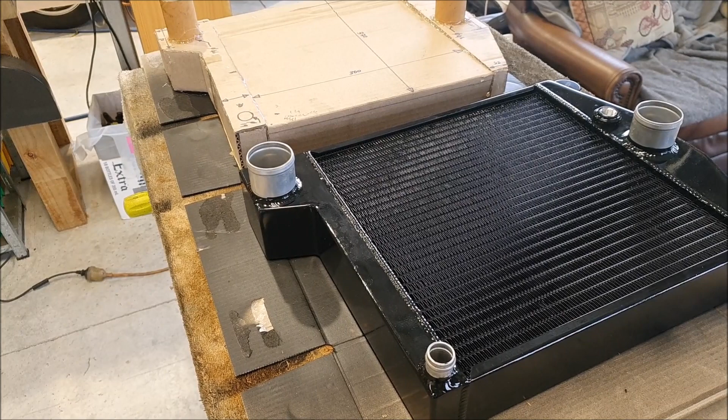It's been a little while since I've made an update on the Riley. I've actually been waiting for parts to arrive.

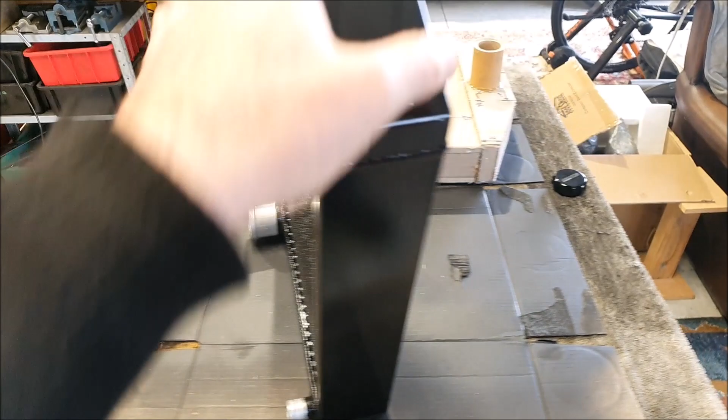So this is my radiator core I had made. You might remember I'd made up a fake steel shell for now, and I designed the biggest modern style core I could fit to go inside there. I drew all of that up in CAD, and I sent the drawings off to a radiator making company, and they made me this modern style aluminium radiator. So it's very light. It's basically made exactly how I specified it, and this should work well.

So the ports on it, obviously you've got the filler at the top. That was the smallest one I could get, which will actually fit inside the Riley one, on the outside of the shell. So you'll be able to take the radiator cap off and then get to this one. I will put a little vent in the cap because this isn't pressurized, of course.

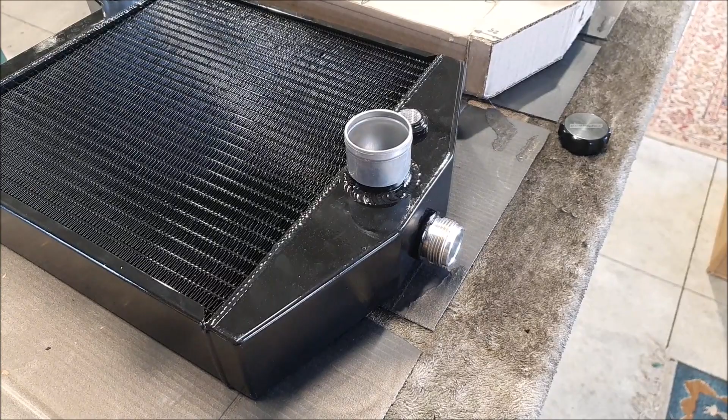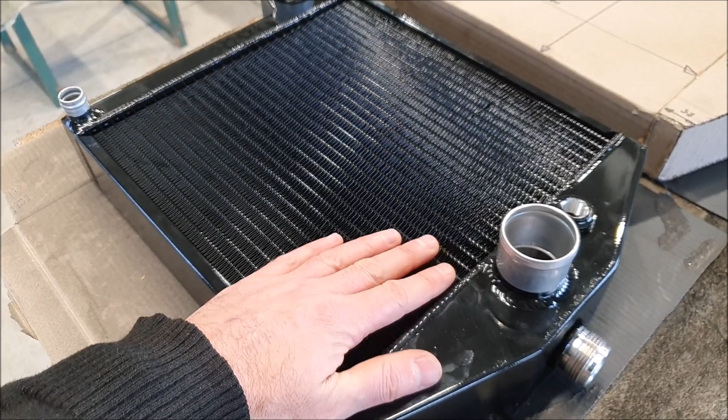This is the water inlet, so this comes from the top of the engine. Obviously the engine heats the water, it rises up in the engine, comes into the top of the radiator, and then cools down with the airflow, and then sinks, and then comes back out of here, back into the bottom of the engine. I've got an extra port up the top here, which is for a temperature sensor.

That's a screw-in one. I've got a mechanical one. It's actually off a Komatsu tractor or digger or something like that. It's all purely mechanical, which is good. It means I don't have to do any wiring or anything, and it looks more or less the part, but obviously I can change the face of the gauge later on, make it look more vintage, put a replica style face on it.

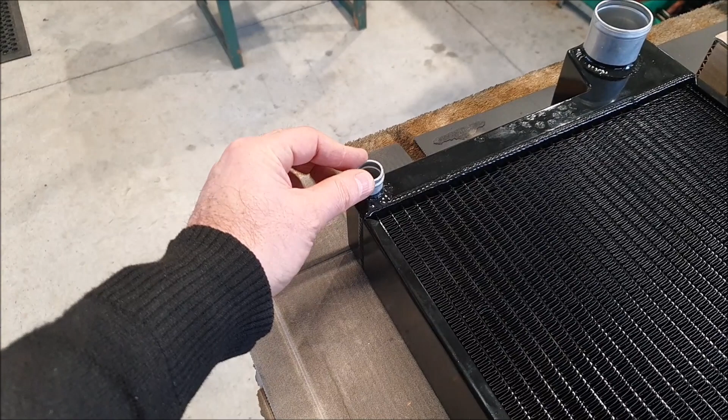I also had them put in this extra little 19mm port, and the reason for this is I'm not sure if I'm going to need a water pump or not with this radiator. I don't know if this is going to be enough to cool the engine. Some people think I should be fine. Other people say no, you'll need a pump. I really don't know, and I won't know until I can actually run the car.

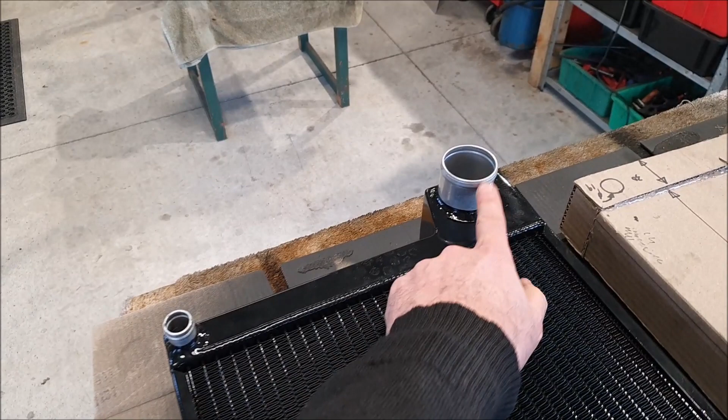So the plan is to initially have this blocked off. There'll just be a little piece of tube and a little blanking thing, or even a tap so I can drain it. And I'm just going to try and see if it works with the thermosiphon, the normal thermosiphon from the engine. If that doesn't work, I have got a little booster pump, and I think what I would do then is block off this side and have the pump on here, circulating the water through the engine.

The reason I had both of them here is just to give me the maximum amount of flexibility, and I can block off whichever one I don't need. Hopefully it'll work without needing the pump - that would be ideal. I'm still trying to get hold of one of the proper Brooklands pumps, but again, it's a special casting, and there's probably one person who's making them, and they're not making any at the moment, so you just can't get them.

After this arrived, I've been looking this morning at how I'm actually going to mount it into the shell.

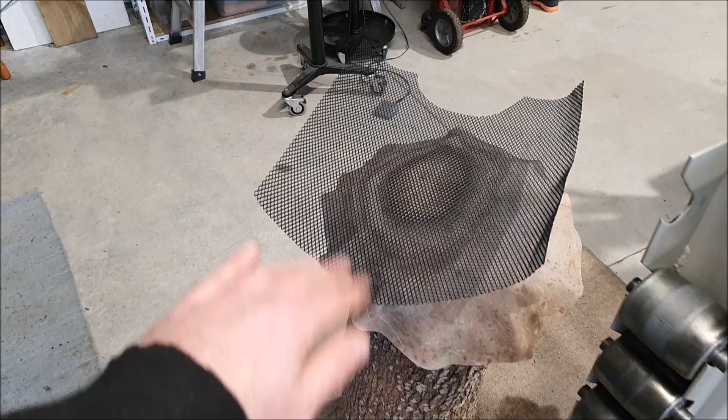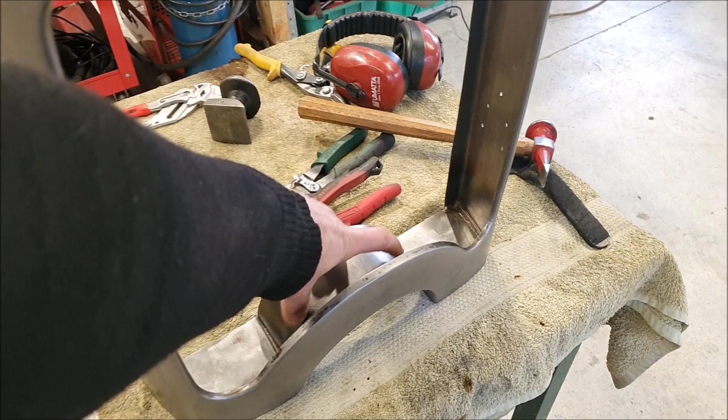So I've got my fake mesh just to go in the front. That's curved, so it actually follows the curve of the shell. And what I'm thinking is there'll be a bracket at the bottom, sort of piece on here, as a flat shelf, and there'll be some rubber padding, and the radiator will sit on that, and there'll be a little plate that screws on the back to hold the bottom of it. And I think I'll have similar in the top.

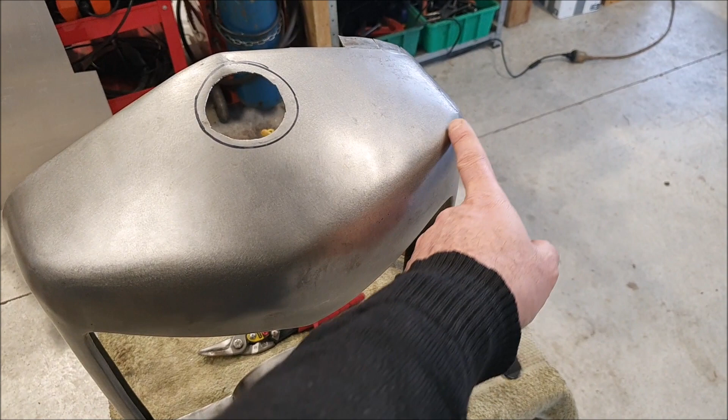There'll be a bar - or a bar's probably not the right word - it'll be sheet steel, but it'll be folded so it's stiff enough, and that'll go across, and there'll be a similar thing to hold the top of the radiator. So there'll be an external piece you put on from the back, which will bolt on, and that'll sort of clamp it all in place. That should be enough to hold it all in place.

While I was doing that, I discovered something.

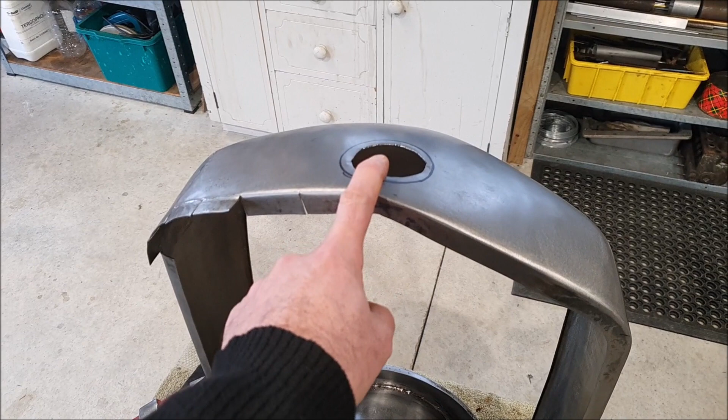So the shell fits in there beautifully. I had to cut the hole in the top. This is just rough at the moment because I still need to get the pipe or a piece of tube that I can then machine the thread on to take the actual radiator cap, and then I'll silver solder all of that in place.

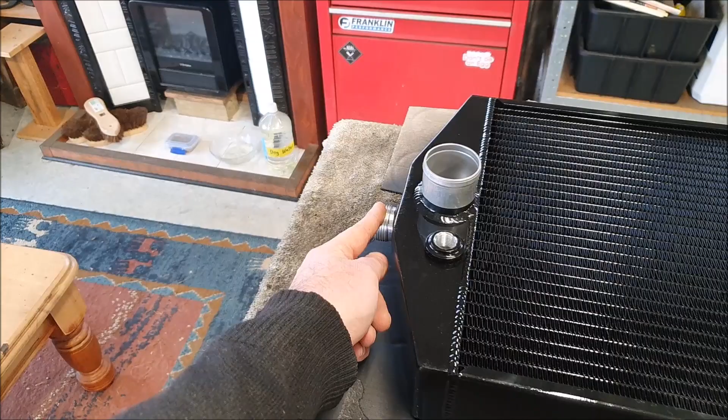I needed to cut the hole because the actual core, I sized it so it would only just fit inside there. So you have to be able to poke this up through the hole in order to get this into the shell to maximize the amount of space I had.

And what I discovered is my shell wasn't actually very symmetrical. I know it's not perfectly symmetrical on that little beak part. If you look at it right from the front and look very closely, you can see it's not exactly right. But what I found was this corner was actually about half an inch too high.

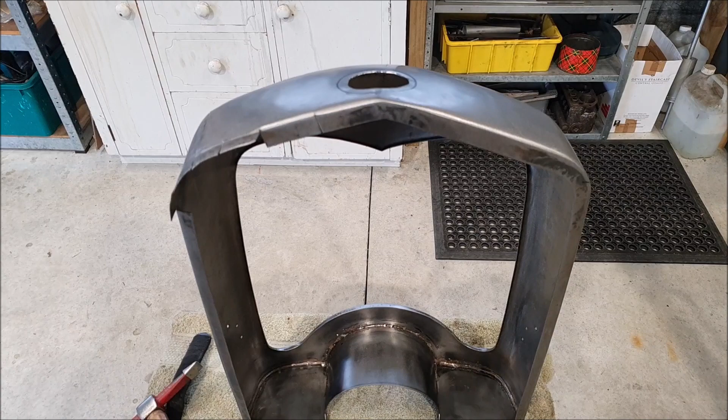I don't know how I managed to do that. I was just trying to get the shape of something like this where it's curved in all directions, and getting it even was really difficult. So that's why this looks a bit of a mess at the moment.

What I've ended up doing is I had to cut these so I could fold them back out of the way because they've been shrunk. And I effectively ended up taking a little pie wedge out of here so I could bring the top down and the side in a little bit.

And I'm still fiddling with this, still adjusting it. I needed to take out, I think the wedge was about 1/8 of an inch thick at this point, tapering down. I used a little cutting slotting disc on a Dremel and my snips and things, so that I can bring this down and get the shape correct, get it symmetrical.

I actually made a cardboard template, so I've matched it to the template now. And then I'm going to have to weld this up and then refinish it all, of course, and then fold the flange down again and re-weld that.

So hopefully that makes it a little bit better. It's not perfect, the shape of it isn't perfect, but when you look at the original ones, they aren't perfect either, they're not 100% symmetrical. So they were probably all handmade as well. So I'm going to fix this up and see how we get on with that.

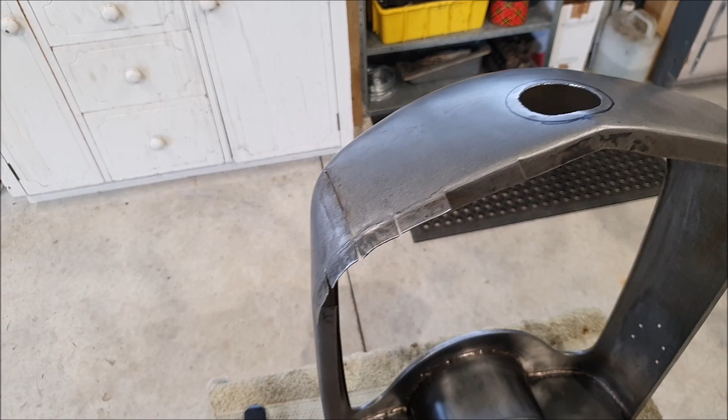I haven't been idle while I've been waiting for the radiator. So I've actually started learning how to do the more form-based CAD that I needed to do to actually design the body. I think I've spent about the last 2 weeks doing that, an awful lot to learn. I've done a lot of parametric modeling, sort of solid body modeling, but this sort of forms type modeling is a bit harder. It gives you a much more organic result, and it was a whole new thing to learn.

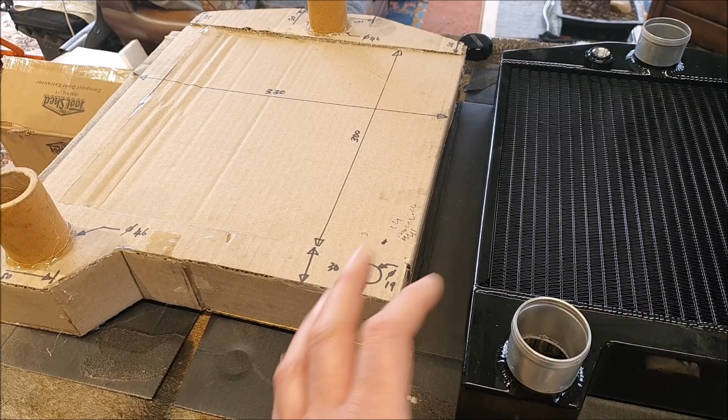So I found some very good tutorial videos online. The chap who does those really explains everything really well, and he's great at answering questions. He even did a specific example for one of the problems I was having to show how to do it. So without his help, I wouldn't have been able to get as far as I did.

So I'll have a look at that when I go back inside. But for now, I'm going to finish trying to get the shell even again and weld it up, and then refinish it again, and I can look at how I'm going to make these mounting brackets on the inside.

As I mentioned in the shed before, I have spent the last couple of weeks waiting for the radiator to turn up, and because that's taken a while, I've spent the rest of the time learning how to do the modeling of the body in Fusion 360.

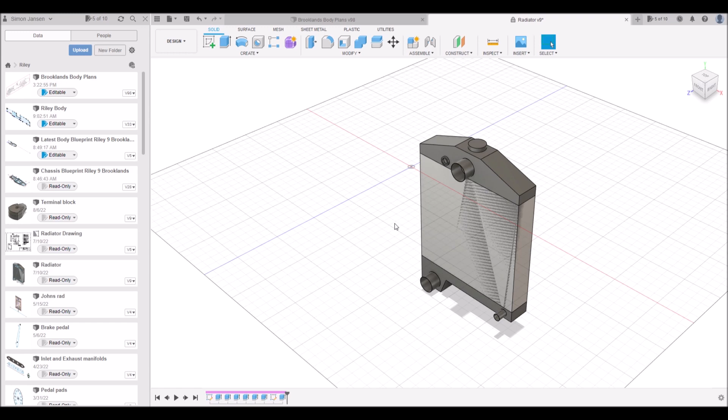So I've used Fusion 360 a lot in the past. Obviously I designed my Enigma machine with it. I've also done simple modeling, simple sort of 3D modeling, where effectively you take a design such as my radiator here. What you do is you draw what's called a sketch, so you lay out the lines, you draw the plan from different views, and then you use that sketch to extrude the parts. So you can click on things and pull them up or down, move them around, put bevels on them, things like that.

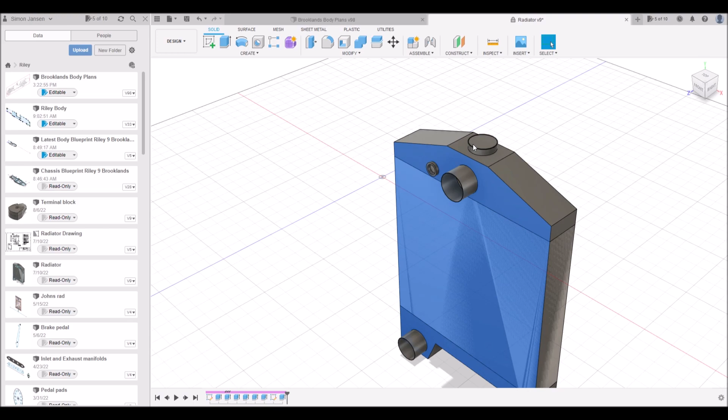So this is really good for doing parts that don't have a lot of curves on them. You can do curves, obviously, so if you pull up a circle like this, you're going to get a curve around the outside. But doing compound curves like this is very difficult.

I've done a lot of modeling like this before, but I've never done this sort of forms modeling. So I started looking around for some tutorials or help on how to do that, and I found a few films on YouTube to watch.

Then I came across a channel called Learn Everything About Design. I'll put a link to it because it's excellent. The guy there, his name is Matt I believe, goes through all sorts of things in Fusion 360, including how to design cars. He records tutorial videos and has got an awful lot of films up there. You can see as he goes through them, he comes up with better ways to explain things, so he'll do another series of films to explain different aspects.

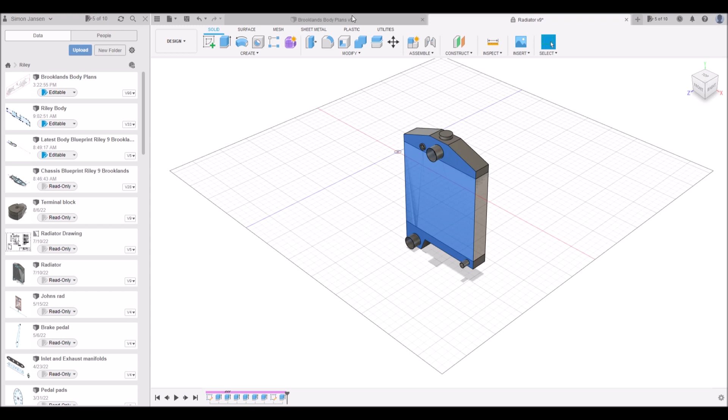By watching a lot of his films, I've learnt exactly how to do this form modeling, as it's called. His channel's quite small, so he's really good at answering comments, and he even did a special little film to answer a question I had in particular, which was really cool and useful. But I'm not going to go through exactly how all of this works because it's really complicated.

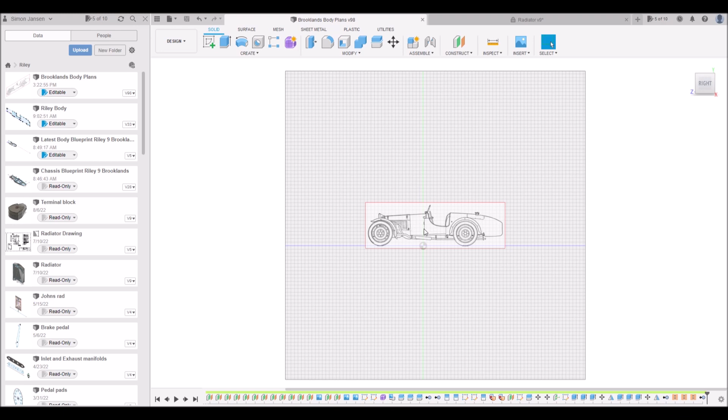Effectively what you end up doing is you find some blueprints of the car, load those into the program, and set them up as top, side, front, and back views. What you end up doing is similar to sketching in normal modeling - you effectively do a sketch, but you're doing it in 3D. You're creating what's called a form.

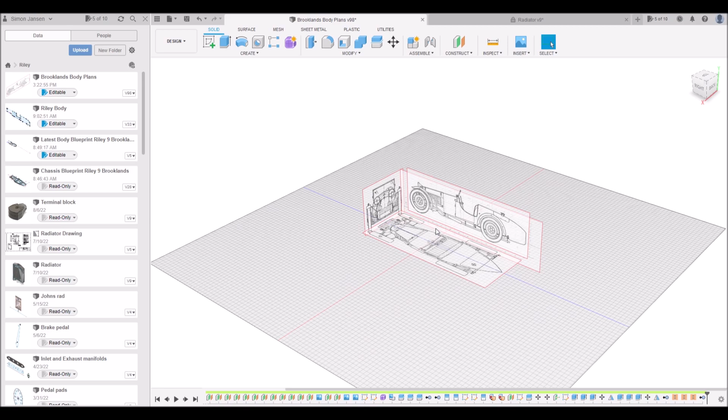If we go to where my form is, this thing along the bottom is called your timeline. This shows everything you've done in this model, but this is the basic form. We can turn off most of these things.

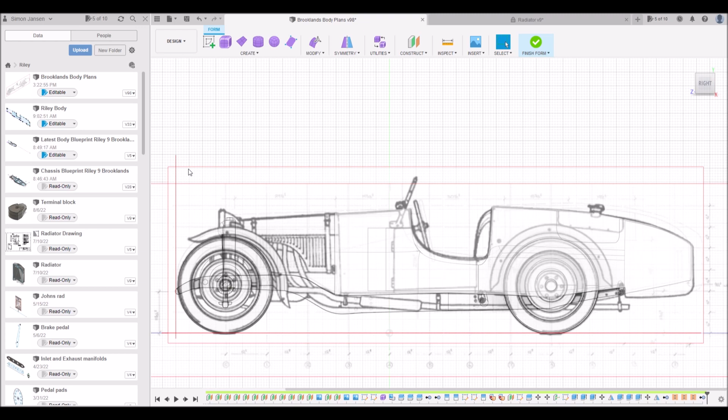If you look at the body, looking at it from the side, you can kind of draw out the shape of the body. What you actually end up doing is you draw it out in 2 dimensions, and then you can rotate it around and start moving these shapes around in 3 dimensions.

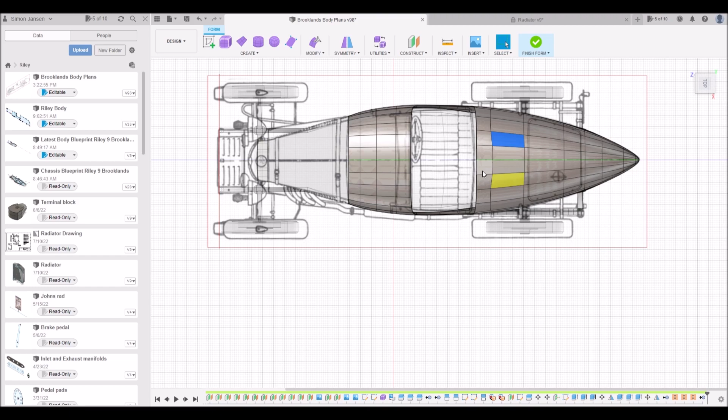I'm not going to go into exactly how it all works, but you draw out these shapes, and the program automatically applies smoothing to them. So if we change the display, you can see the shape I'd drawn out with these different panels - it's now smoothed them off.

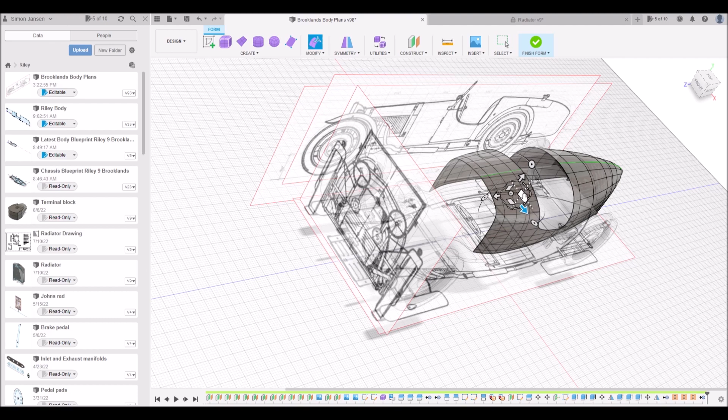You can rotate this around, grab points on it and modify them, move them around in 3 dimensions. I've got this mirrored, which is why it's got that green line there - it's showing the mirroring line. You can grab points, move them around, change the shape. You can do all sorts of really cool stuff with this.

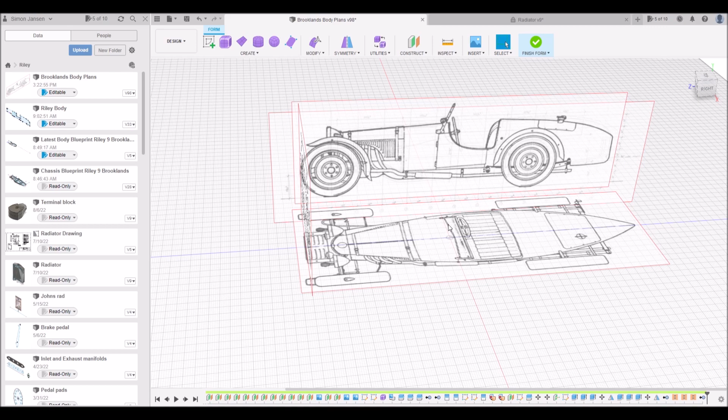So I started off with this blueprint, which is available online. It's actually a blueprint from a toy maker, I believe - I think that's the original source. This one's been floating around all over the place, you see it in multiple places, but I believe the original source was for a toy car. So it's pretty accurate, but not 100% correct.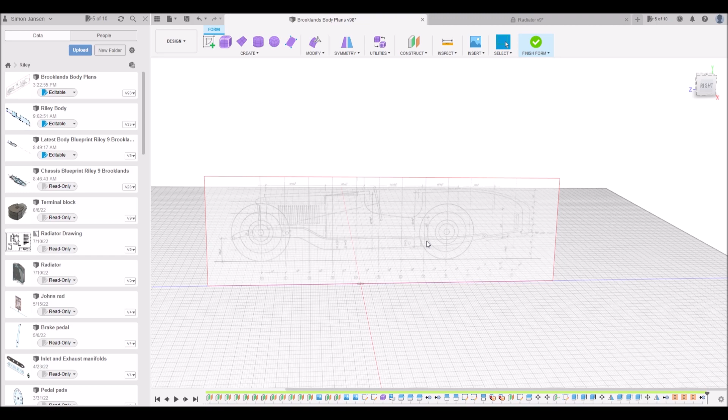I also happen to have the plans that were made of 8075, which is the car I'm effectively copying. But that car didn't have, or rather these plans were drawn up for a doorless body. The original car had doors, and I've got the original door skin, but these plans are without a door, so this was for a different body. That also gives you a lot of the dimensions.

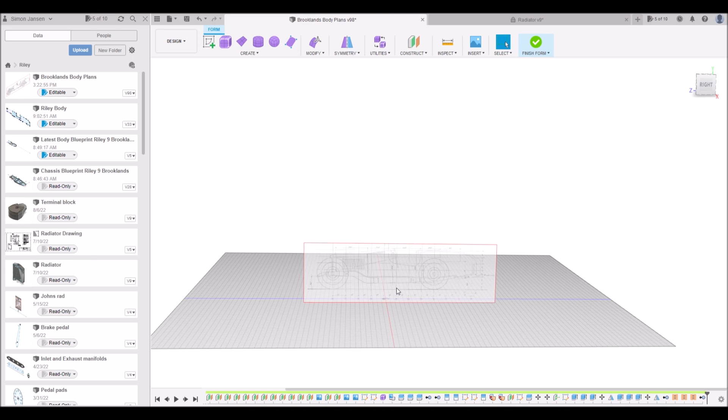I've also had copies of, or pictures of frames sent to me that I can look at, and I also have another sketch sent to me by a friend that has some measurements on it. None of these sources match up - they're all completely different. The general dimensions are the same, but I've had to piece together my own measurements for everything, and basically I've based it all off the chassis I actually physically have.

So that was one of the first things I modeled, was the chassis, and you can sort of see that there if we turn the canvas off.

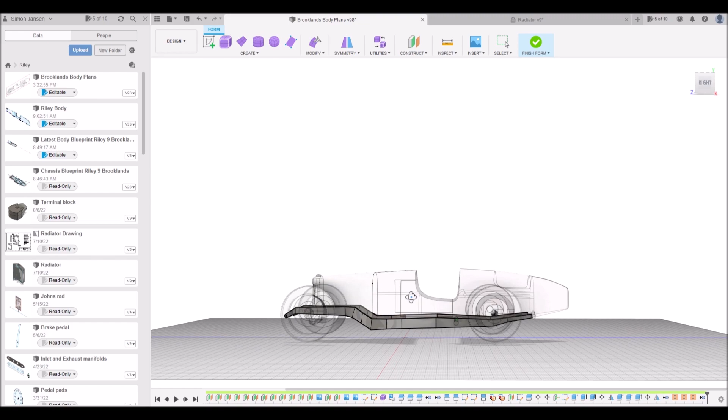Again, this is the display as it appears. The way the smoothing works is effectively each of these lines is a spline, which is kind of controlling the curvature of the lines.

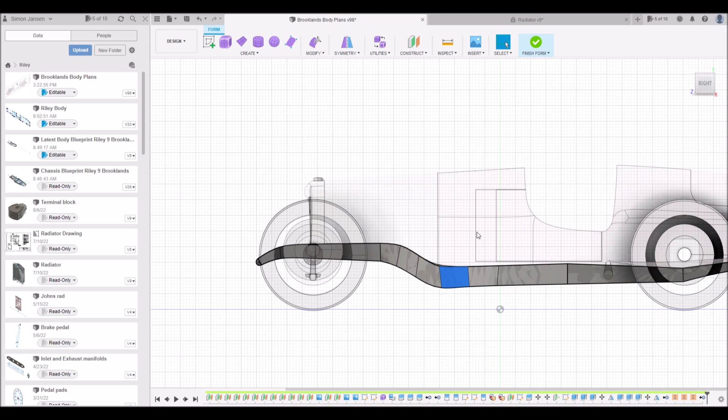Now, this is how it looks, and you actually end up editing it in this view, but when it actually renders, it turns it into the smooth view. What I've found is you get quite good at knowing what your movements in one view are going to do in the other view, and how it's all going to be affected. So like I say, I've been playing with this for several weeks now to try and get the hang of it and understand how it works.

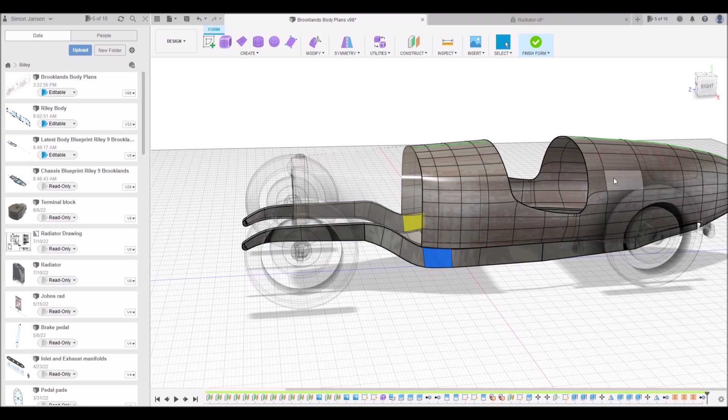So I started with the chassis, and then I started modeling the actual body. I did model it with the cockpit cutout in it from the start, but for things like the doors and the boot lid, I did those a different way, where you draw the outline and then use that to cut the body you've got. That's how you can remove openings like the boot opening and the door openings.

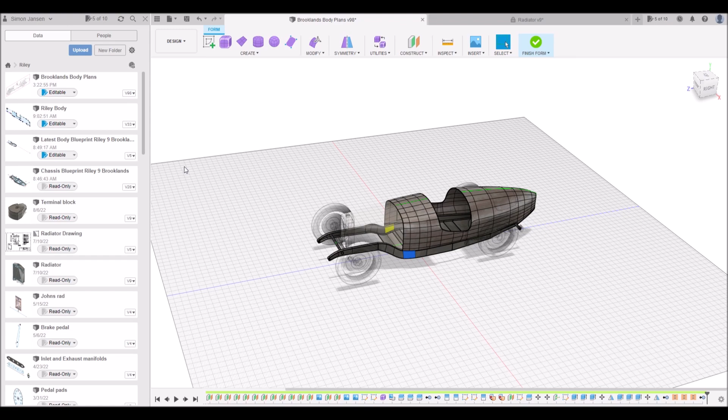So that's basically what I've been playing with. I've also modeled up the other bits and pieces. They're very simplified, so things like the wheels are simplified, the radiator is simplified. The general dimensions are correct. I've got the front axle there. I have the springs on it.

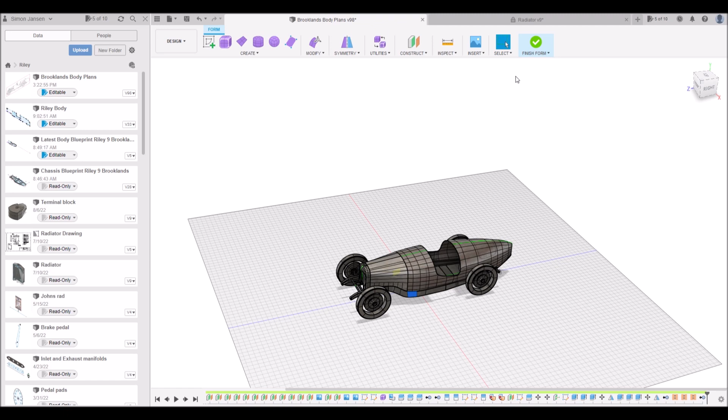If we finish this, the springs and things like that, I actually modeled the old-fashioned way, or what I call the old-fashioned way, which is just draw it out and extrude it. But you can see that gives you a reasonably accurate layout of the springs. The measurements are all correct. I've just noticed a wheel has moved, or something's moved there.

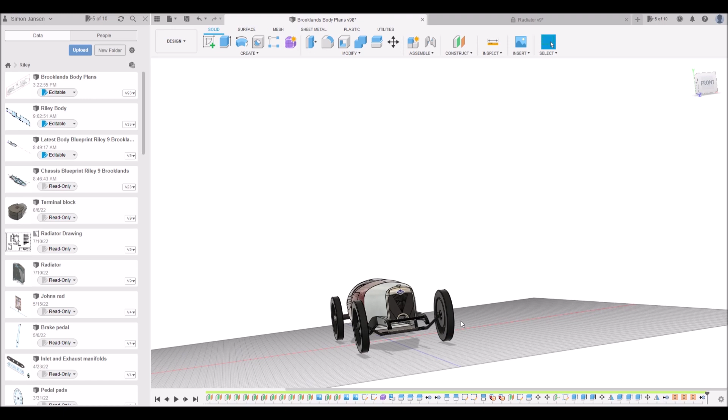It is very easy to get confused and end up breaking your model. You can see there I've accidentally broken something. So I'll have to go back in the timeline and figure out where that break happened and fix that.

So put the springs on. And that's the good thing, you save it constantly. You can see I'm up to version 98 because I've been saving it so often.

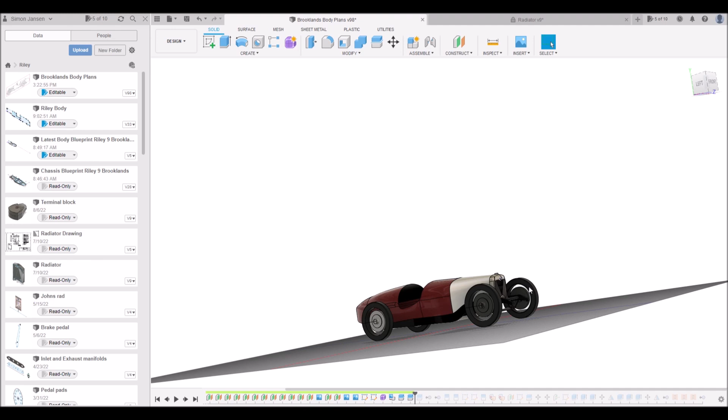And I can go back here in the timeline. You can actually move this around. You can see it was okay there. So some movement I made at some point has broken that. Yeah, it's that one there. So I can go in and edit this and change what I did.

You can see what it was affecting. So I'll go back and fix that soon. Then actually I'll probably stop this and fix that, because otherwise it's going to upset what the next step is.

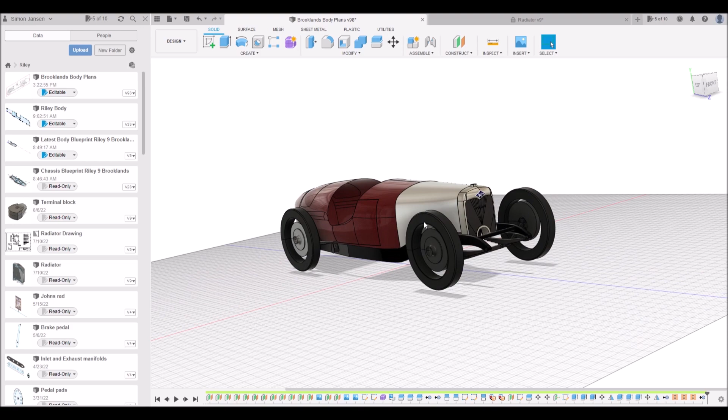But you've got all sorts of controls for changing the view. That takes away the lines. You can see that's got the hidden lines there. This is just visible edges. You can turn off the edges so you can see the actual smooth shapes.

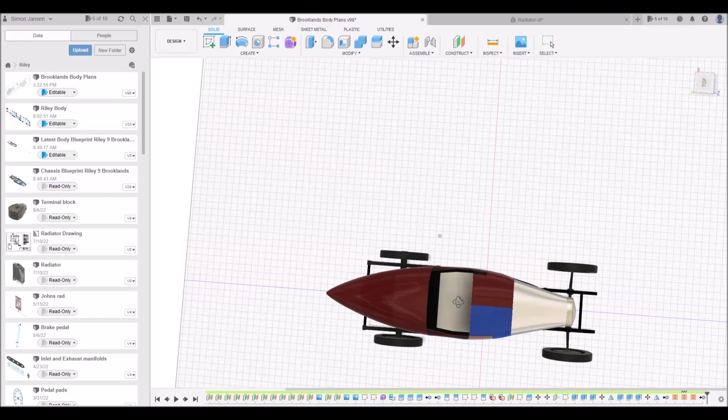Obviously you can rotate it around, look at the car. You can turn on and off or hide individual bits and pieces. So that's the boot lid there. You can take that away, have a look.

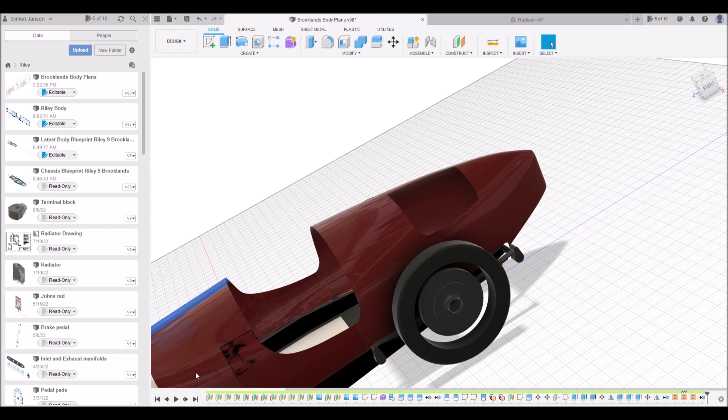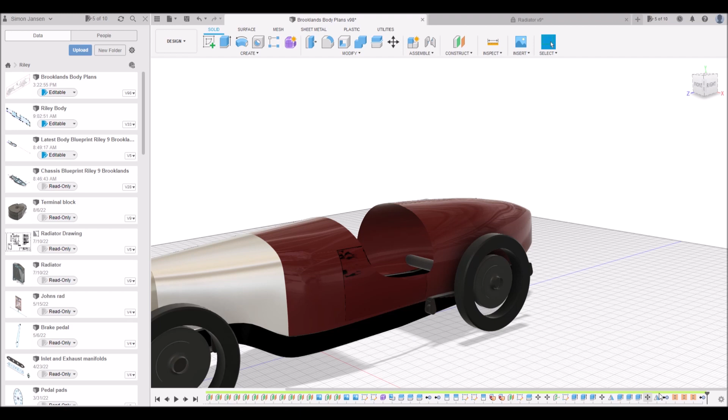Something else has gone wrong there. It's kind of stitched, you can join pieces together, and I've obviously joined a couple of things together wrong. So I think this model has got a little bit confused because I have extra pieces here that shouldn't be there. I may be having to go back quite a bit and figure out where I've actually messed it up. But the good thing is it's all saved, and you can go backwards and forwards, and tweak things as much as you want.

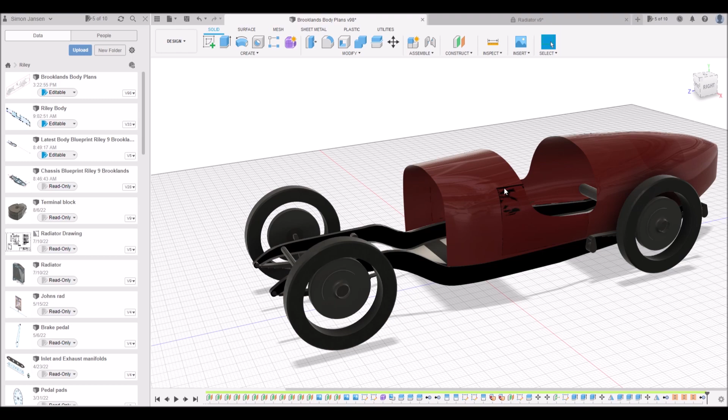We can turn off or move components so you can see what's going on there, which is pretty neat. What I'm planning to do is take cross sections off the body, since I know where the framing needs to go. For example, there's a framing piece that goes along here, another piece along here, a couple in the tail. So I can take those cross sections, look at them end on, and hopefully print them out and scale them, so I've got drawings I can use to actually lay out the body, the timber framing.

So I'm going to stop and fix this, and then we'll have a look at what it looks like when it's all drawn nicely.

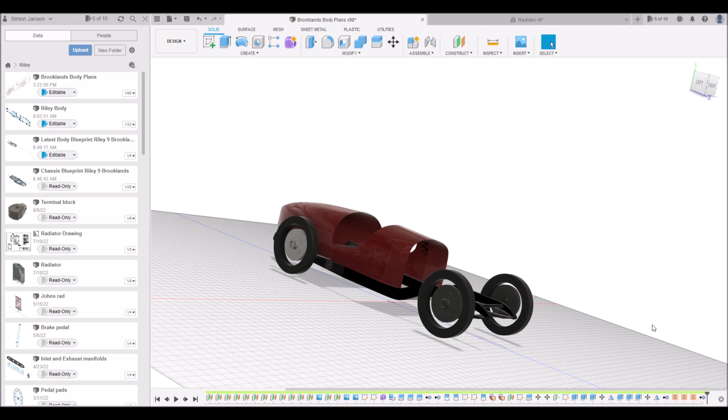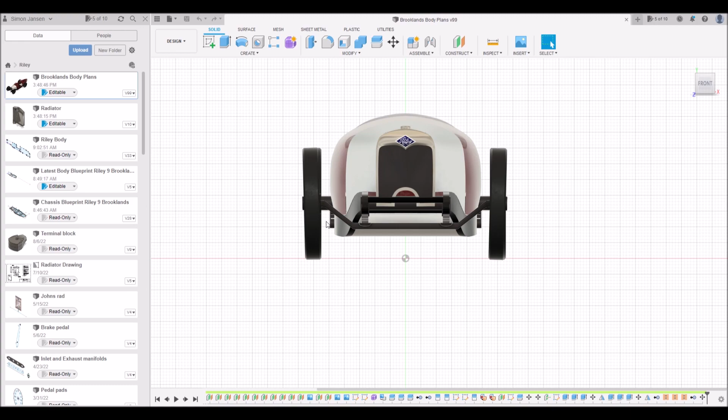Okay, I ended up fixing the mistake in my model. It was that movement I had done to move the timeline back to basically put the camber on the front wheels, and I had to select the tires and the hubs and brake drums. I just selected the wrong side, so that's all that was.

As I was saying, this lets you model the car very accurately, or accurately enough that I can use it to actually build the body. The other cool thing is you can change the appearance of different parts of the car. So obviously I've got the bonnet here as just plain aluminium, but you could see what the car looks like if that's painted red. You can just change the colors of everything, which is quite cool.

The other neat thing you can do with this is a kind of scaled drawing. Like I was saying, you can rotate it around, you can see what it looks like. I haven't done any of the interior or anything like that. That actually worked out to be a good thing, because I'd designed the body, the curvature of the doors here.

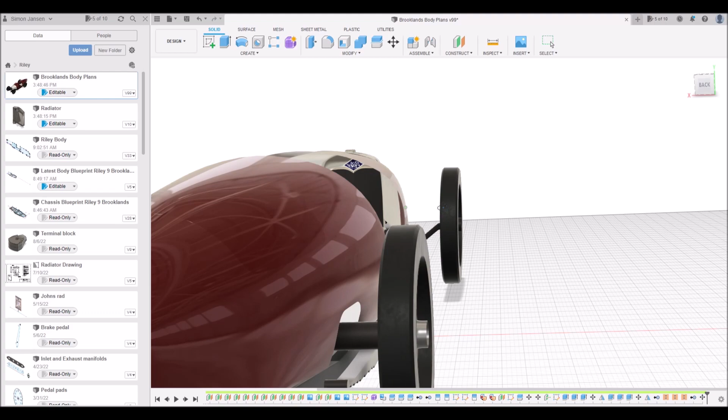This is based on what they call the barrel-shaped bodies. You can see it's very pregnant looking, very round. And I believe I've actually got a little bit too much curvature in there at the moment, so I'll need to adjust my model.

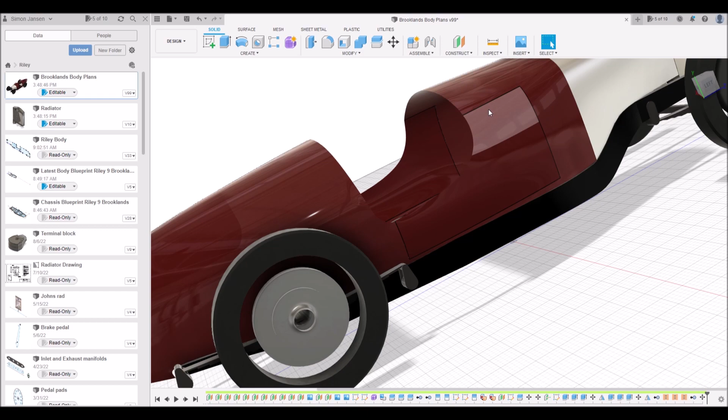I drew the body first, then I cut out the doors. You can see the doors are actually not symmetrical. The driver's door is a lot longer than the passenger door. You can see that quite clearly here. After doing the body, I started adding in a few of the other details.

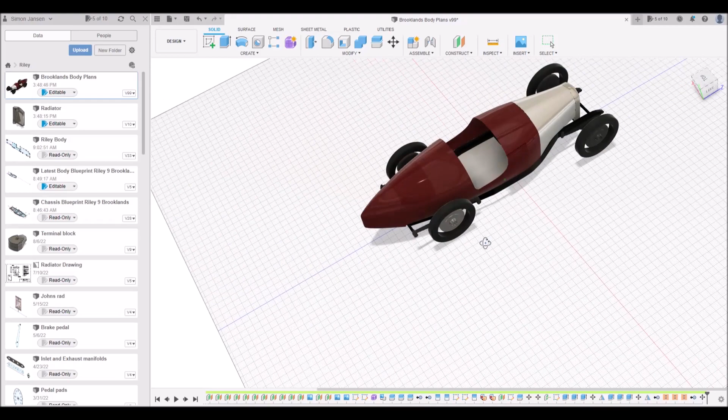I added the tyres first because that sort of helps lay out the car, and I went ahead and put in simple axles and also the leaf springs. It was after I did the leaf springs that I discovered the body is too curved, because if you look here, you can actually see the spring is hitting the body. There's too much curvature at this point, so I'm going to need to flatten this out.

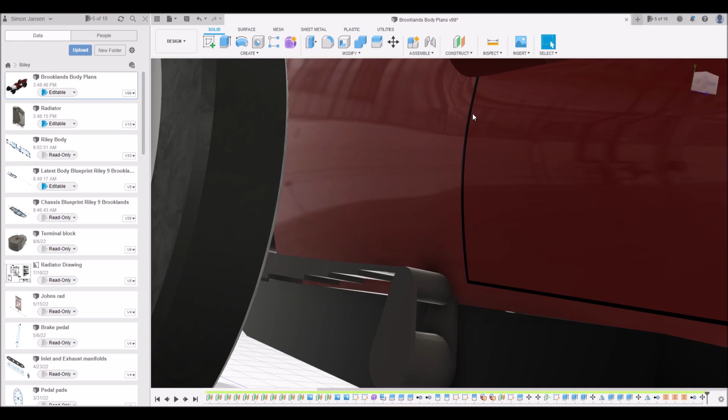This back edge of the door is actually fairly flat, looking at the door skin I've got, so I need to adjust the curvature in here. The cool thing is, with CAD modeling like this, you can just go in and do that easily and it'll recalculate everything for you.

Things like the springs and the axles and the actual positioning of everything are based on the actual rolling chassis I've got, so I know it's reasonably accurate. But this is kind of the general shape of the body I'm looking at.

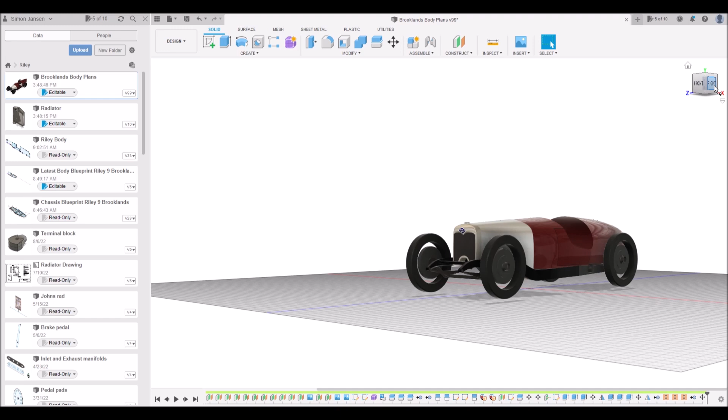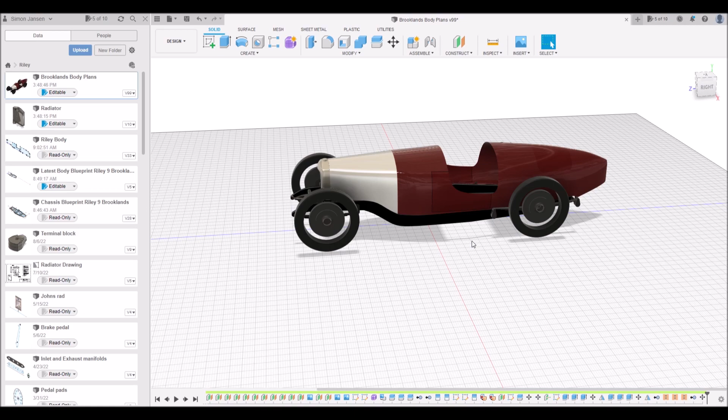If you look at the original cars, again, you find no two of them are the same. They're all completely different. I've spoken to people who have built different versions of these cars, built replicas, built specials, who have measured up original ones, and they were saying there can be a 6-inch difference in the chassis measurements. The bodies are all completely different. So really it's up to me to build something that looks right, and what right is, is kind of up to me, I think.

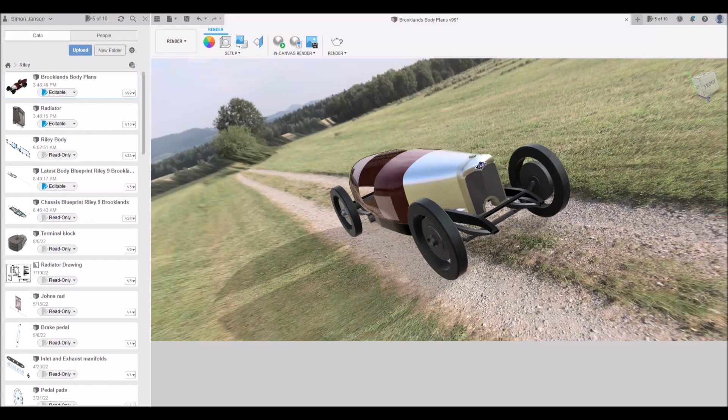So this is what I've got so far. I'm still tweaking it, trying to get the shape right, trying to get the tail right. One cool thing you can do is create nice pictures of these things and drop them down into these sort of backgrounds. It just gives you a little bit more context of the car, what it'll look like from all different angles.

You can see here I made the boot lid panel a slightly different shade of red, just so it kind of gets picked up. I've put in the door gaps and things like that. So yeah, this is basically where I'm at with the modeling.

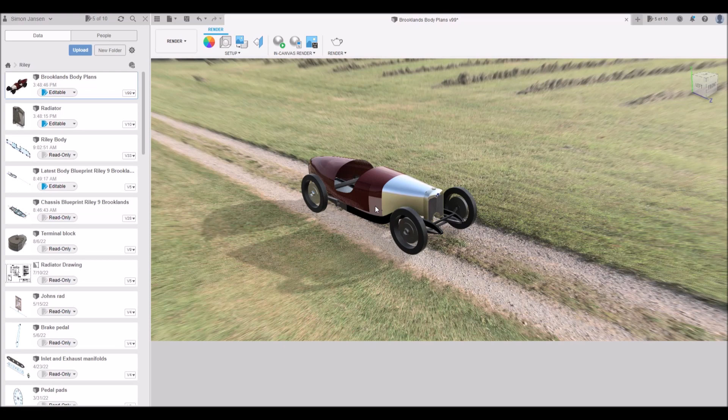This has taken several weeks of pretty intense studying and experimenting and playing with this to get this far, but I'm really pleased with how it's come out. I have no idea how you would actually model spoked wheels, individual spoked wheels. That's probably quite difficult.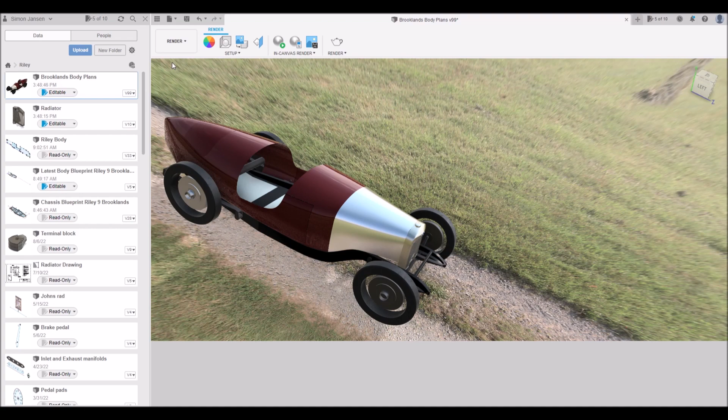But I think this is good. And there's lots of really cool other things you can do in here. You can do analysis of the body to see what the curvature is like. So if we actually select the entire body, you could do all sorts of neat stuff.

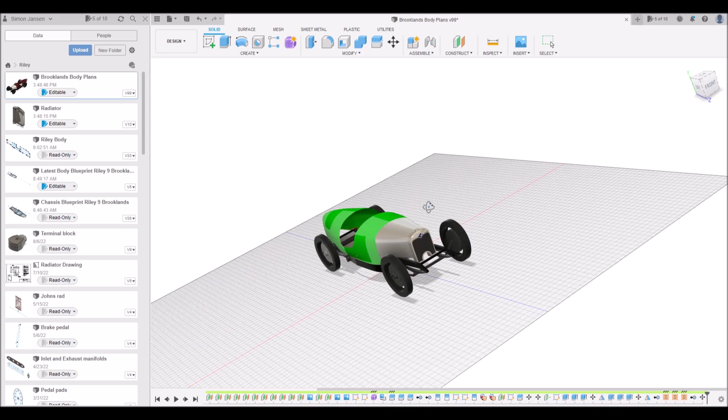So this is effectively showing me where the maximum areas of curvature are, and you can see it's on the tail there. You can do what's called a zebra analysis.

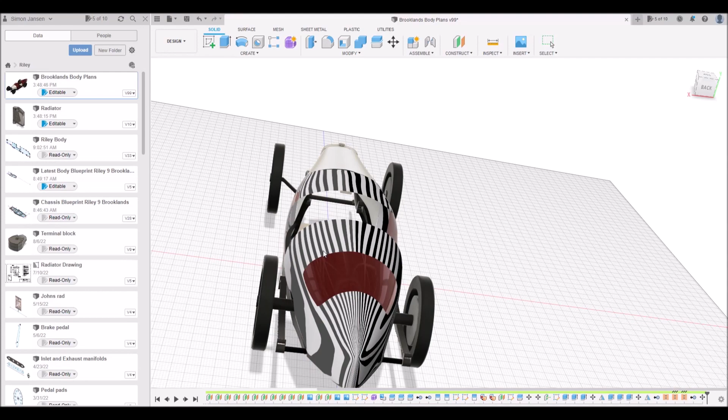I can't even remember where the menu is, up here. So again, you select the body, and what this one shows you is the transitions between the curves, and you can look at the pattern, and if the pattern moves cleanly over the body, you know that the shape of it is correct.

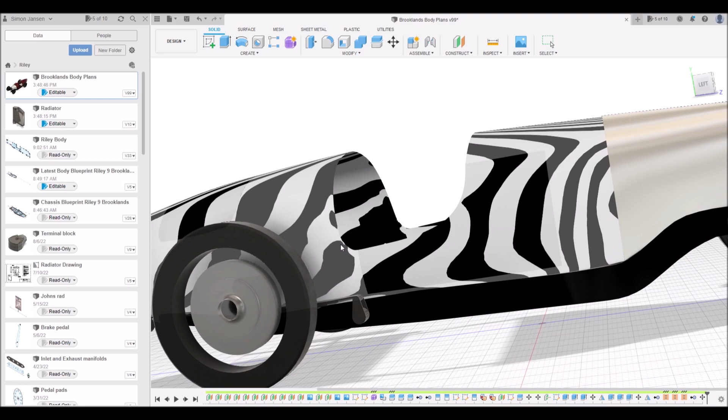So you can see there's a little bit of distortion just around the back of the doors and things like that, but overall the shape of it's very smooth, the lines are very even, so it kind of shows me that I have the curvature more or less correct.

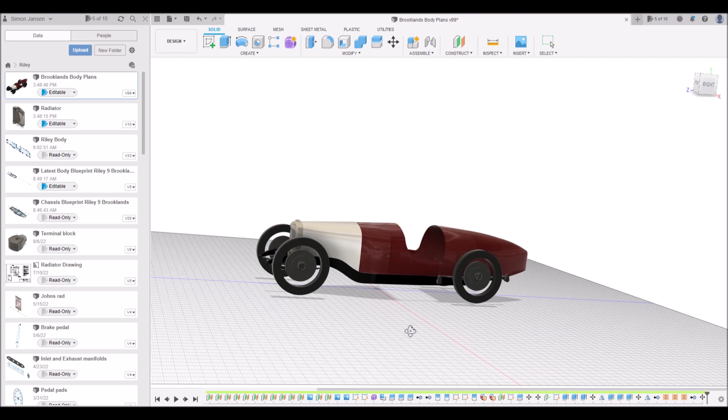Yeah, there's all sorts of cool stuff you can do with this software. And the good thing is for personal use, it's free. It is all cloud-based, of course, but it's really nice, and it lets you do some really nice things.

So I'm going to fix the curvature of the body, I think, and then later on I will have to do the analysis, the sectional analysis, I guess.

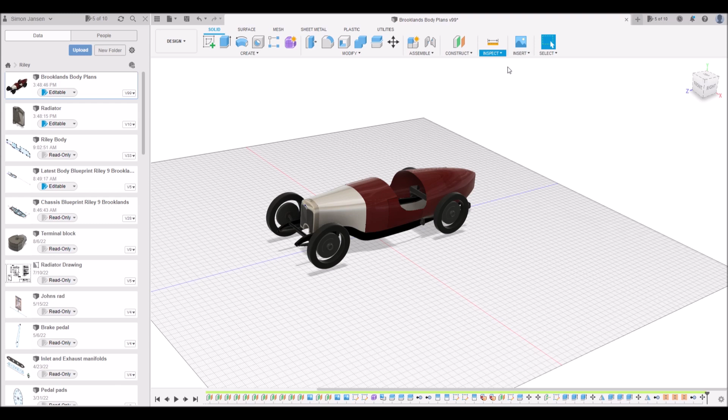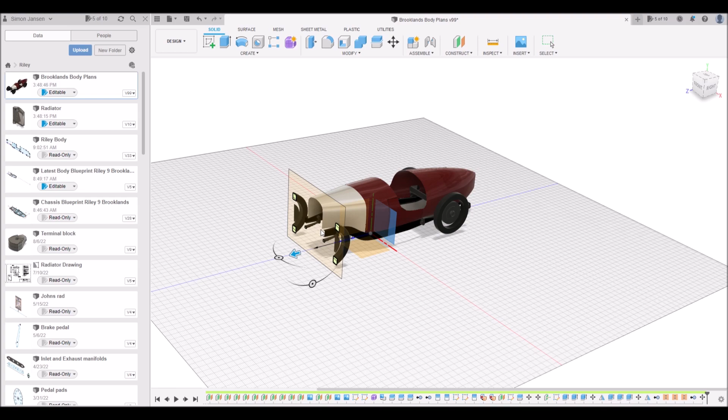I haven't really played with this that much, but you can see you can definitely take sections off the body. I don't know if I can then capture those, but what I can actually do is draw the vertical slices off the framing timber I need and then project those through the body, and you can break it up into pieces like that. That should then be able to give me the sections I need to make the frame at certain points.

So like I say, it's a very, very cool tool. I'm still learning everything it can do.

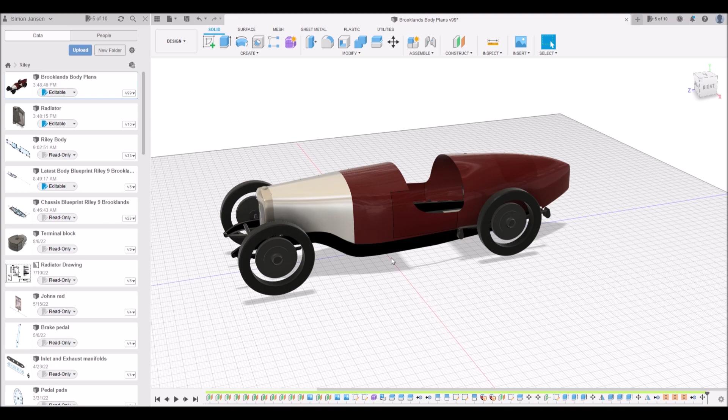And there's lots and lots of information out there, but I really recommend that Learn Everything About Design YouTube channel. His stuff is excellent. I think he actually makes instructional videos as part of his work, so his videos are really well done and explain things well. I couldn't have got anywhere near this without the help he gave through his channel, explaining and showing how to do things.

But it's quite neat being able to model it like this and see what it's actually going to come out like.

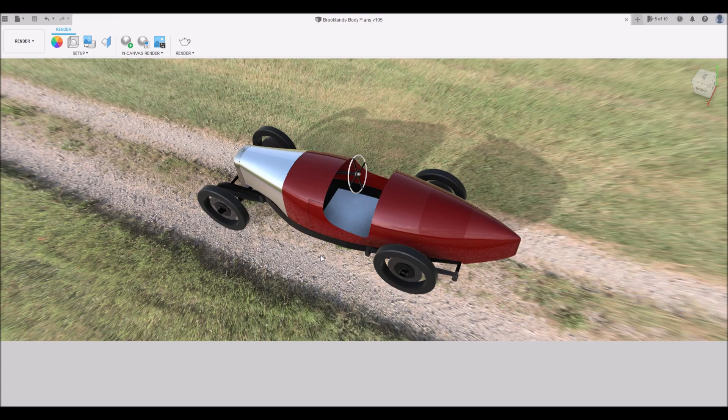I went and took some measurements from my actual chassis and compared that to my drawings and discovered the drawings were 1 inch too wide, and that's why I was having problems with the spring hitting.

I've slightly tweaked the curvature on the body, and if we zoom in now you can see that that has clearance. It's not a lot of clearance, only about a quarter of an inch, but that should be enough. I've actually seen pictures of cars where you can see the body's actually rubbed against just on the edge of the spring shackle there.

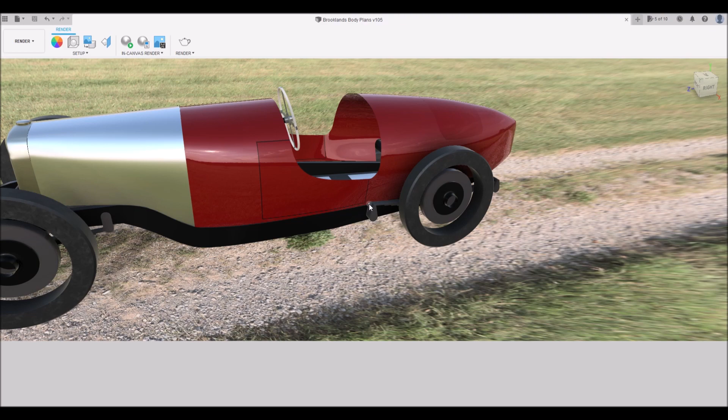The other thing I did is added in the steering wheel, so that's in the correct position and the correct angle, so I could check that it actually does clear the body and the doors, so that nothing was hitting there. But I think that's starting to look pretty good now.

You sort of get a good idea of what the shape of it is actually going to be. It still does have the curvature in the doors, and it is still nice and sleek, low down sort of car. So I'm pretty pleased with how that's coming out so far.

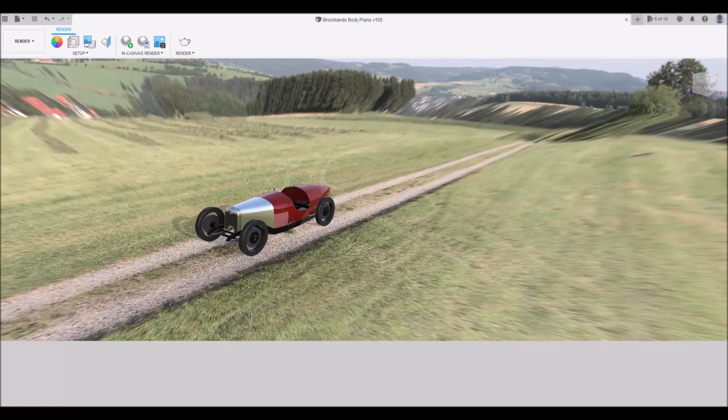The next job will be to actually get these different stations and transfer those somehow to full-size patterns. But I think that looks really nice.